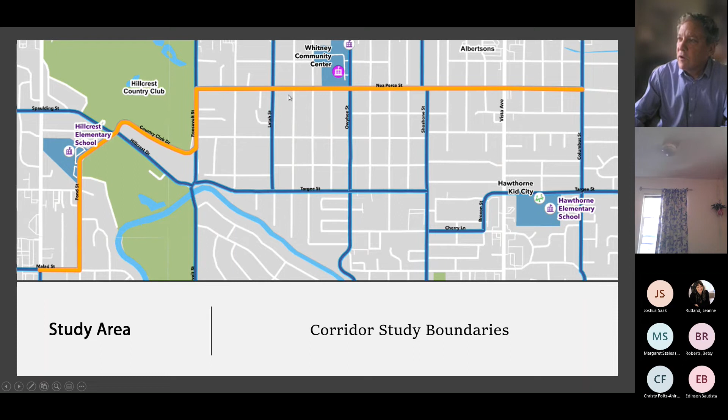We'll go east on Malad Street, where we turn north on Pond, taking us all the way up to Hillcrest Drive. We'll then go down the bench on Country Club, where we intersect with Roosevelt, with a brief segment going north, and then we'll turn again to the east and run down Nez Perce all the way to Columbus.

This project is a little over 2 miles long, and given the length and difficulty of showing it, plus the diversity in the segments, we decided to break the project into 5 segments, starting at Malad and Orchard and progressing east. Segment number 1 is from Orchard Street all the way to Hillcrest Drive, and we'll walk through in detail what the proposed changes are here.

On Malad Street, we did hear from several participants as we've been through this project that an enhanced pedestrian and bicycle crossing here at Orchard and Malad would be beneficial.

We didn't propose a design on that yet, but when we get into detailed design in the next fiscal year, that'll be something that is decided on. It's likely that it will look like the enhanced pedestrian hybrid beacon that's on Vista Avenue now, that was just installed within the last year or so.

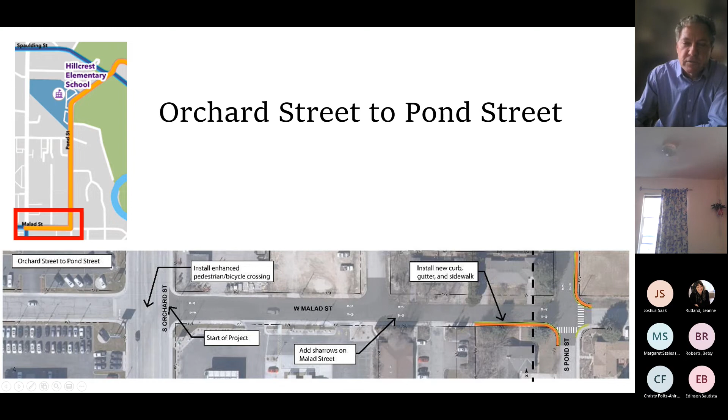In general, one of the themes of this project is that we want to fill gaps in the sidewalk network wherever possible. That's what you're seeing here on Malad on the south side. We'll be filling in this gap as you come up to Pond Street. We'll also add sharrows on Malad, which gives bicyclists an indication of where they ought to be positioned within the road, and signals drivers that bikes will be present within the travel lanes.

The next segment is here from going north, and so I've changed orientation on you on this drawing. On the bottom, going from left, this would be south, going north, and you can see again that we are filling in gaps in the sidewalk as we go to the north.

I'm sorry I stumbled and paused there just because I realized I forgot to do the survey at the first, after the first segment there.

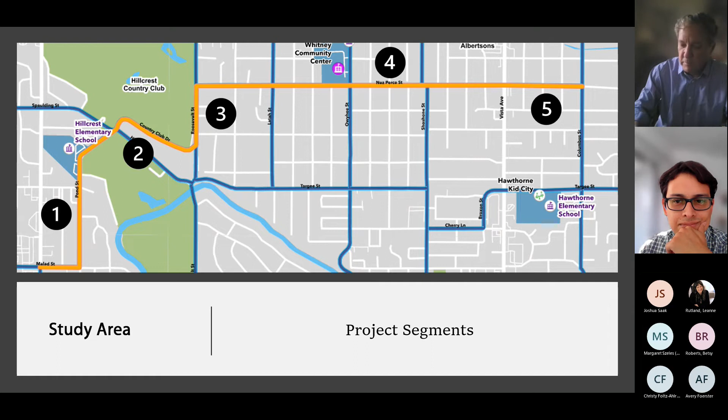And segment 1, talked about that. Here we are again going from Malad north on Pond Street. And what we've proposed here is to fill in gaps on the east side of Pond Street in the sidewalk network. This will give us a continuous pedestrian connection from Malad all the way up to Hillcrest Drive.

And what you'll note here is this will preclude on-street vehicle parking on the east side of Pond, but on the west side, residents will still be able to park on the street or just off the street as they do now.

Again, continuing to the north, this gets us further north on Pond, up here at Hillcrest Elementary. And you can see we're not proposing any changes to this segment. We've got a complete sidewalk network, and we'll be adding the sharrows to the roadway to, again, indicate the positioning for cyclists.

And then going a little bit north of Hillcrest Elementary, you'll see we do have one small missing segment of sidewalk there on the west side of Pond, and we will go ahead and propose to fill that in.

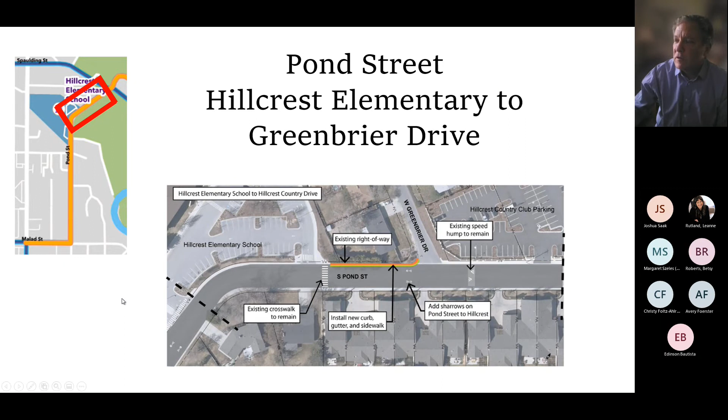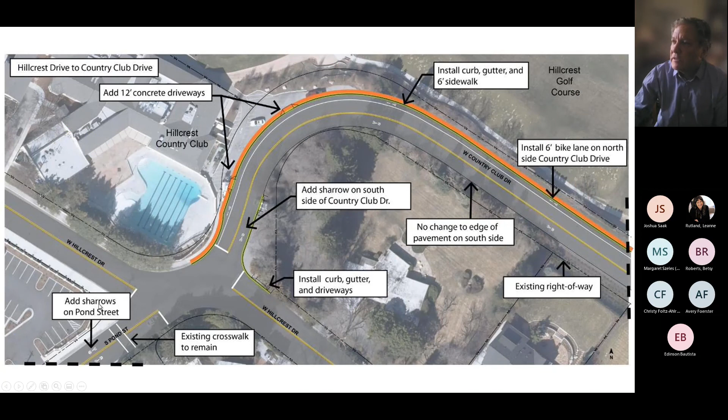Now we're on segment number 2. This is Country Club Drive, going down the bench. This would be Hillcrest Country Club at the upper left, and then of course to the north of the road. And on this segment, we had originally proposed to add a bike lane in both directions, that is in the uphill direction and the downhill direction.

And based on the public feedback that we heard, a lot of pedestrian activity happens on this road, and the public was very interested in seeing better pedestrian facilities. For that reason, we made a change in the proposed road section, and that would be to add sidewalk on the north side of Country Club abutting the golf course, along with a dedicated bike lane adjoining that sidewalk.

And then in the downhill direction, we would add a sharrow rather than a bike lane. That takes up less space, and also cyclists are more likely to keep up with traffic in the downhill direction. And so this was felt to be a good compromise in response to what the public was asking for.

It will also help that sidewalk we'll be adding here better define the interface with Hillcrest Country Club and their delivery area, and we'll provide driveways to accommodate that use at these 2 locations.

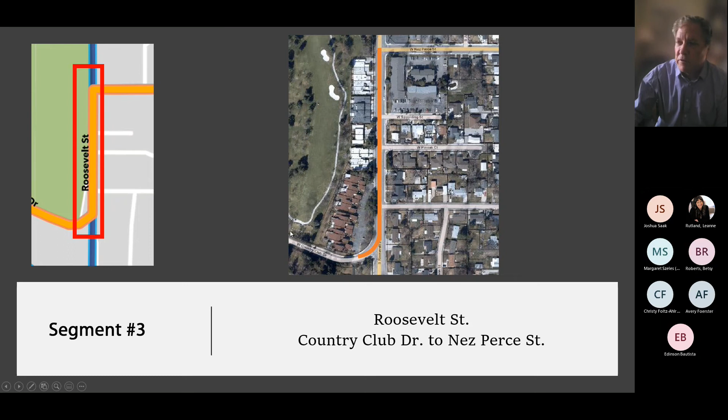Which brings us to the bottom of the hill, where Roosevelt and Country Club Drive come together. This has a fairly significant amount of changes, so I'm going to walk through these slowly. And Edinson, if you want to hop in on this, please feel free to do that.

First, I'll note that you can see existing sidewalk here on the north side of Country Club Drive. Residents will recognize that sidewalk currently ends right here, and this is where we will pick up that sidewalk, match this alignment, and extend it all the way around up to Hillcrest Drive. You can also see the bike lane being added there, and then the downhill sharrow.

A significant change we've proposed is a realignment of the intersection, to tighten up the turning radius in the southbound direction as cars come from north on Roosevelt Street and want to make a right-hand turn onto Country Club. We've proposed some islands to better channelize the traffic and provide safer pedestrian crossings. A companion effort is to add a bulb-out on the east side of Roosevelt Street, and then an enhanced pedestrian crossing with rectangular rapid flashing beacons. Those are pedestrian-activated signals that indicate to vehicle drivers that pedestrians will be crossing the road.

Another significant change on Roosevelt Street is that we will add buffered bike lanes in both directions, north and south, which is what you're seeing here. We do have enough right-of-way to maintain the existing on-street parking on the east side of Roosevelt. However, the addition of the buffered bike lane, and what you'll see in the next drawing is a gap in the sidewalk being filled, would mean we'd have to eliminate on-street parking on the west side of Roosevelt Street. And finally, you see we're picking up a small gap in the sidewalk network here. This will get us a complete connection all the way up to Nez Perce Street, which is our next drawing.

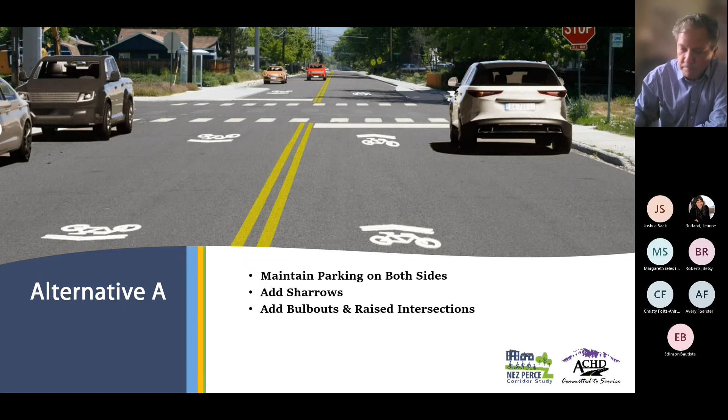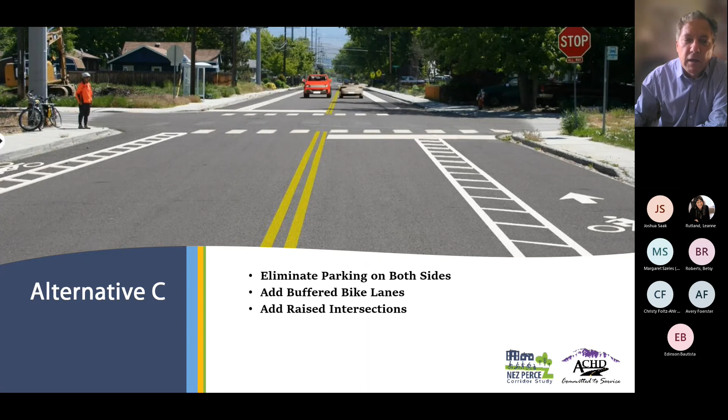Alternative C eliminated parking in both directions in favor of buffered bike lanes in both directions, as well as the intersection treatments mentioned before. This one was also discounted because it was felt that alternative B was the better compromise, which maintains on-street parking on the north side of the street and adds bike lanes in both directions, plus enhanced intersection treatments.

The advantage here is that we're able to maintain essentially half of the on-street parking that exists today, and we don't create any new conflicts up at the elementary school, where we currently have a bus loading zone and a no-parking zone for drop-offs and pickups. So this was the selection of the team and the public, the most popular alternative. In this rendering here, we're looking at Latah Street, looking to the east, of course.

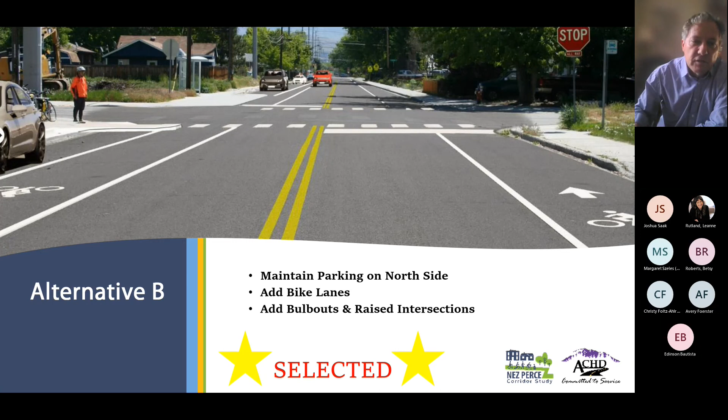You can see the addition of bike lanes, as well as maintaining parking on this north side. And here you can see a bulb out on the north side adjoining the existing bus stop, which will create a nicer zone for people using the buses.

With regard to the intersection treatments, what you can see here are the intersections proposed for improvements. The green dots indicate where we would add bulb outs on the north side of the street, and there are 3 of those. You'll see those in plan view as we go further into the slides. The yellow dots indicate where we're proposing raised intersections, and there are 4 of those.

What you can see on the map is that basically these dots are all about 650 feet apart, a little more than a tenth of a mile, which will give us the desired traffic calming effect and address some of the comments we heard from the public about speeding on the corridor. Finally, there are 2 existing 4-way stops that will be maintained at Latah and Owyhee there at the school.

Edinson, did you want to hop in?

Thank you, Darren, and thank you for this information. A lot of the proposed improvements are intended to provide that traffic calming element along the Nez Perce Street corridor, especially with the presence of the Whitney Community Center and elementary school. Certainly that's a key connection for students to walk or bike to school, and also for parents who drop off their kids, as well as being part of the bus route that connects that section. So certainly these will be calming elements that will encourage that.

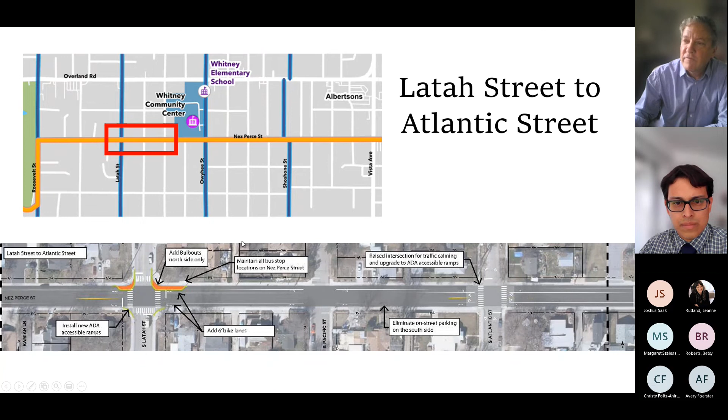Moving to the next segment, which roughly goes from Latah over to Atlantic. Here is the Latah bulb out that I referenced with the existing bus stop there. And then just another raised intersection at Atlantic Street here, again about 650 feet to the east.

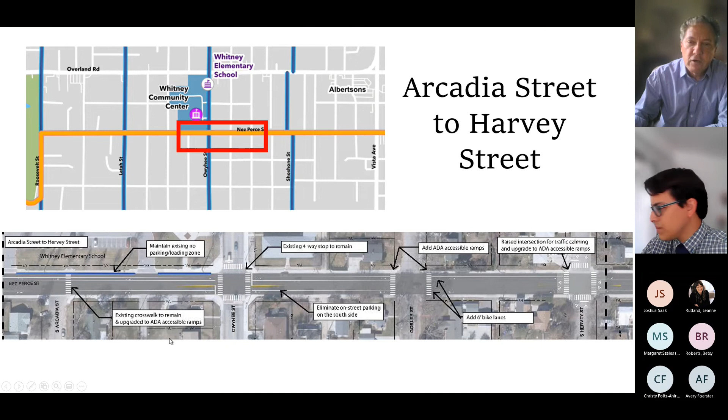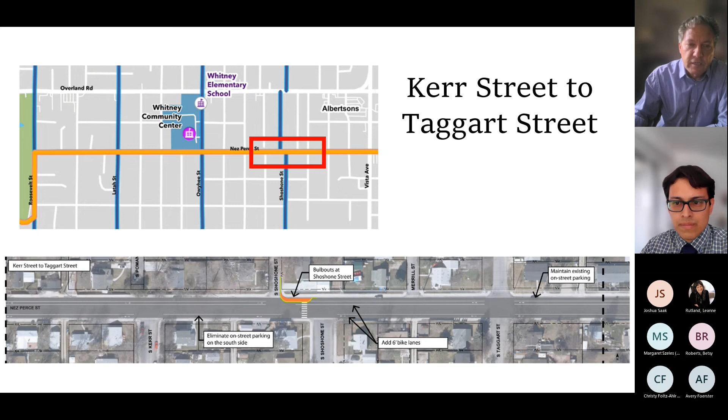And then finally, Kerr Street to Taggart is what you're seeing here. Here in the middle of the drawing is Shoshone, where we have an offset intersection, an existing pedestrian crossing that will be accommodated with an additional bulb out there.

And that would get us to Columbus Street and the terminus of the project, which gets us to the Q&A section.

So again, go ahead, Darren. Yeah, thank you, Darren, thank you for all that great information and walking through the proposed improvements for the Nez Perce Street Corridor Study. Certainly we have several questions, and we can go back and forth between some of the slides, right, Darren? Yes, sir.

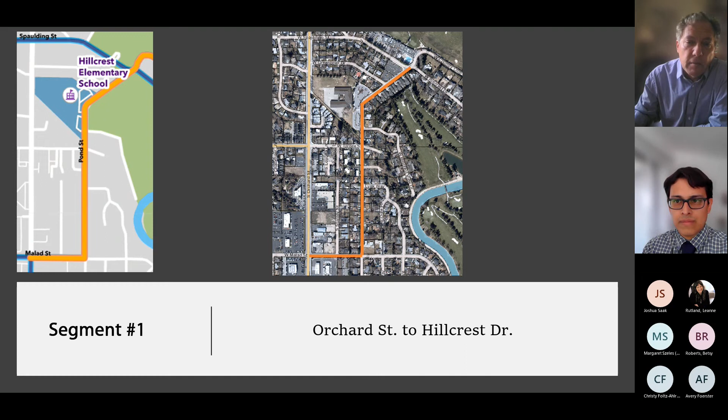Specifically on this stretch of Pond that goes from Malad to the north, it was felt that a compromise filling in the sidewalk gap on the east side gets us a continuous connection all the way to Hillcrest, and still allows for some on-street parking on the west side, without having to take any additional right-of-way from landowners.

And correct me if I'm wrong, Darren, but that's exactly what we heard from the community, right? We heard the interest of some members in sidewalk on both sides, but with the current property limits and the public's desire for on-street parking, this is the best alternative we came up with. We felt it was a good compromise that addressed most of the public comments we heard.

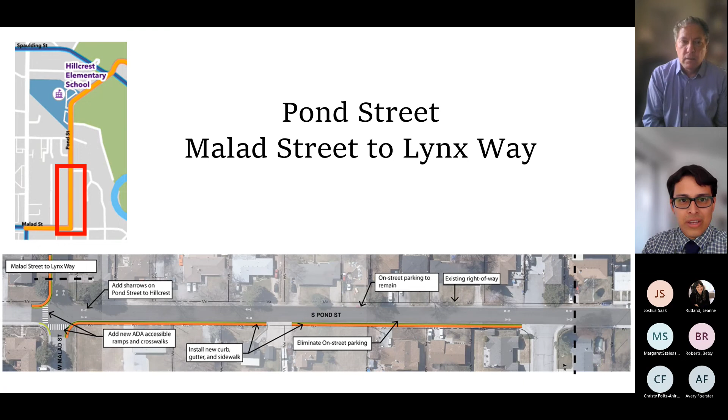And with the east side, we continue to show that crossing near Hillcrest Elementary, where kids would be able to cross that street to their school. That's correct. Nothing will change about that existing crossing, and there is a sidewalk on both sides of that street.

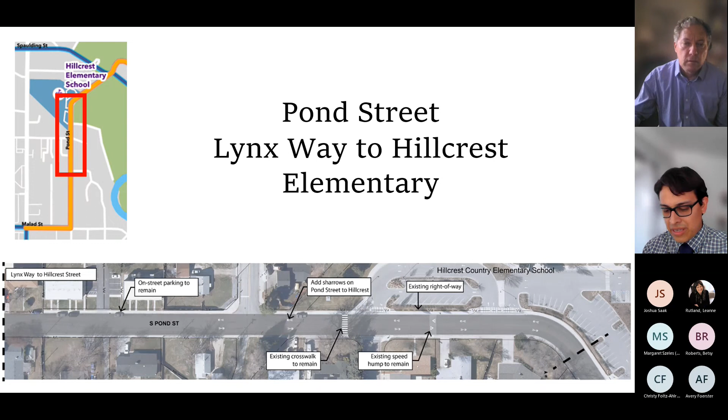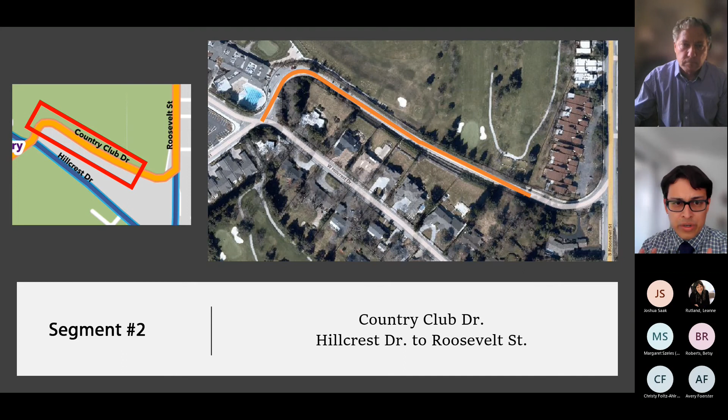Perfect. The second question I have here, Darren, is regarding Country Club Drive. With the current space that we have, will we have enough space for sidewalk and bike lanes at this location? And what are the limits behind why we didn't choose to go with two bike lanes?

Good question. We do have more right-of-way on Country Club Drive. As you can see, the back of sidewalk is still several feet off of the right-of-way line. However, anybody familiar with this roadway knows that the land falls off fairly quickly to the north, tilting toward the country club, and it becomes awfully expensive to build retaining walls large enough to accommodate a sidewalk as well as two bike lanes. So the short answer is we were limited in the space we had.

We don't have a lot of room on the other side either because we're at the toe of slope for the back of these properties. So again, this was felt to be the best compromise: to add sidewalk on one side of the street and a bike lane on the climbing, uphill side, while allowing for a sharrow on the downhill side. We were trying to serve the most users with the best facilities while keeping it as cost efficient as possible.

Thank you for that explanation, Darren. My next question is regarding Roosevelt. For that portion of Roosevelt, one question we received is what type of impacts do we present with the installation of sidewalk on the west side of Roosevelt?

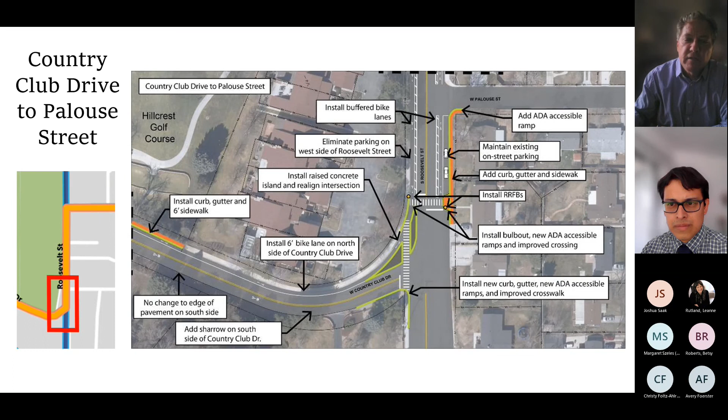I'm sorry, Edinson, can you rephrase that for me? So what type of impacts are we looking at with installation of sidewalk on the west side? What you can see here is the sidewalk ends where these existing townhomes start on Roosevelt, and we have a lot of driveways with no curb, gutter, and sidewalk on this side whatsoever.

It was felt that a good compromise was to maintain the existing on-street parking on the east side of the road, at the bottom of the drawing, and fill in the gap on the west side, at the top of the drawing. That required, because we have more right-of-way to the east than to the west, eliminating the on-street parking on the west side of the road, so we didn't have to request additional right-of-way from property owners there. This allowed us to fill the gap without taking any additional right-of-way, serving pedestrians in this neighborhood while still maintaining more than half of the on-street parking.

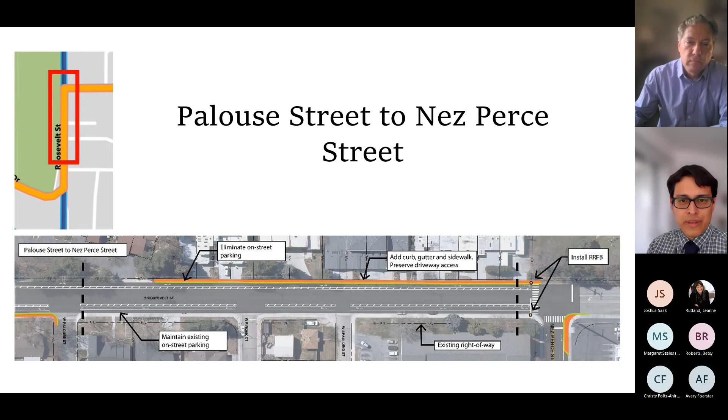Thank you, Darren. My next question goes into Nez Perce Street between Roosevelt and Vista. Maybe Josh can jump in too. Talking about a raised intersection, what type of traffic calming elements does it give to people driving, walking, and biking throughout the area? Josh, do you want to take that, or do you want me to start?

Sure, I can go ahead. A raised intersection is going to be very similar to what you see in design for our typical speed tables or speed humps. It has the same profile and provides very similar benefits. The only difference is that it encompasses the entire intersection, as opposed to a speed table or speed hump, which is only maybe about 12 feet wide. So it's going to have pretty similar effects to a more traditional speed hump or speed table that you might see on a lot of our local and collector roads.

And I would agree with that. It signals to drivers that they need to slow down, and it also makes pedestrians a little bit more prominent and visible just by keeping them up above the road that much higher.

Perfect. Taking that into consideration, I'm reading through some of the comments, and some refer to the need for more bulb outs throughout the corridor, especially at those locations, for example at Cart, Shoshone, and Taggart. Can you expand a little bit on those locations, Darren?

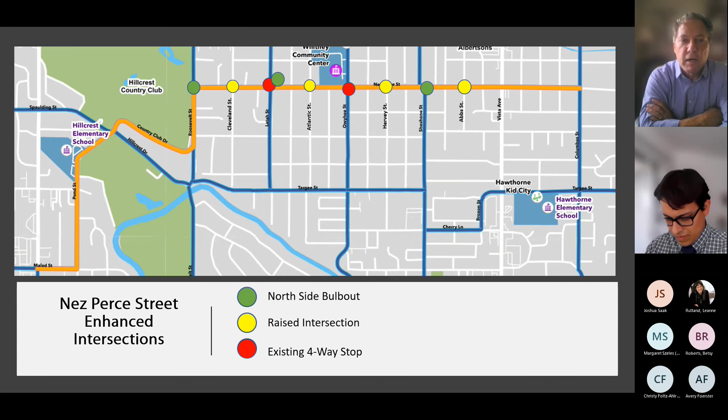And so again, as a compromise solution, we added the bulb outs at locations where we didn't have a raised intersection or a four-way stop, to again get that traffic calming effect of keeping vehicles at about a 650-foot distance before they reach some sort of signal to go slow and watch for bikes and pedestrians.

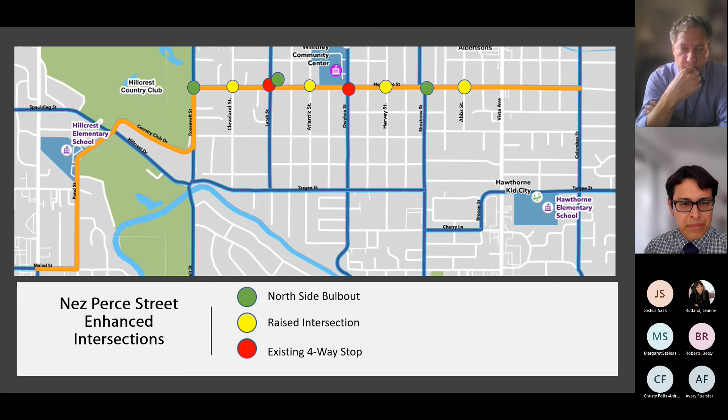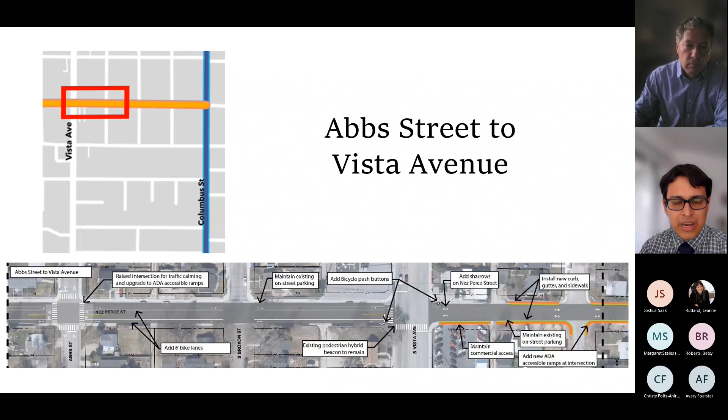Great, thank you, Darren. And finally, my last question goes to the last segment, segment 5, Nez Perce from Vista to Columbus Street. So some of the comments we're reading through are regarding the need for some traffic calming along that stretch. Can you talk to us about the challenges on that segment, and why we went with the current proposal?

Sure. So this stretch of roadway is a fairly short stretch, about a half a mile or so, I believe. And it is a fairly low volume street, with fairly low speeds now.

The installation of sidewalks where they're missing will have a traffic calming effect of its own, particularly with on-street parking on the street. And so again, in the interest of trying to serve all interests and all users, and be cost efficient with the public's dollars, we propose to just fill in the gaps in the sidewalk system and then add sharrows rather than bike lanes on this stretch.

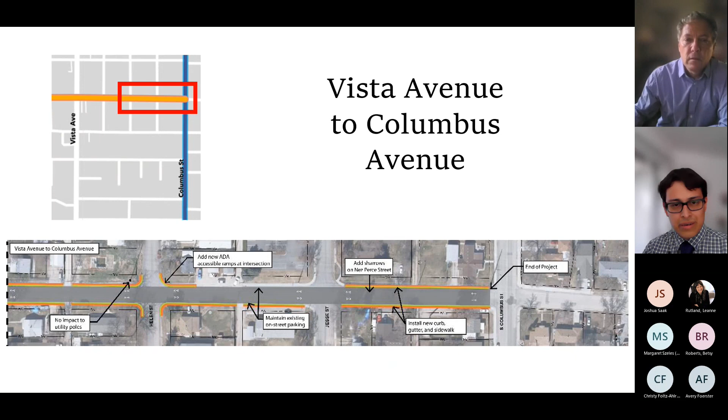That sounds great, Darren. Thank you for that detailed description. So those are the questions that I have, Darren. Certainly appreciate the work done, and certainly this is the proposed improvements we have.

So Darren, I will let you continue towards the next steps and talk about the schedule and how the public can provide their comments moving forward. Right. So I will show you a link again where you can go and view the full project online and take the full survey.

Having gotten through our last public information meeting, which we're doing right now, our team will take all of this back, as well as the information we received from the online survey, and we will refine these drawings into a preferred concept, which will then be packaged into a report that can be taken to the ACHD Commission for consideration and adoption.

I'm not sure, Edinson, that we have a firm date yet that you'll have that in front of the commission. Have you scheduled that?

So right now we're looking for a pre-adoption in November, where we're going to release once again the draft plan, the draft concept, for public review. So something to expect as we start refining the concept. The public will have an opportunity once again to look at what that preferred alternative will look like before it goes in front of the commission for adoption consideration. So something to expect as we get closer into the fall, late fall, winter part of the year.